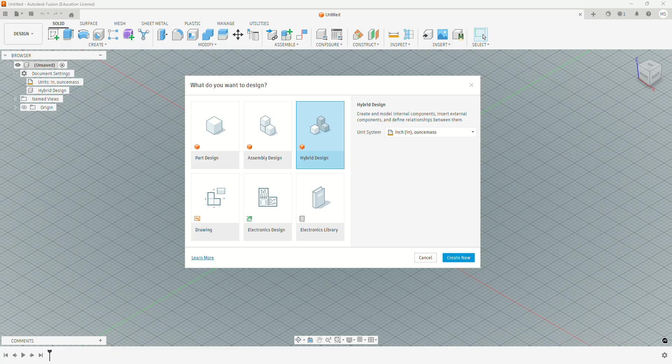The first thing you need to do is get to a new design. In the new update of Fusion, you have to be in a hybrid design. If you're already in here, click on your browser under document settings, and if yours doesn't say hybrid design under the units, click this little pencil and change it from a part design to a hybrid design. The other way is to just start a new design and choose hybrid design. You've got to make sure you're in a hybrid design, because otherwise you won't be able to do new components.

The first thing I'm going to do is activate a new component, because I'm going to build this block up as different pieces. So I'll go to Assemble, New Component, and call it Shape 1. You don't have to name it, you can just call it Component 1, but I'm going to give it names. So now I'm working on Shape 1.

Let's say I want Shape 1 to be like a corner piece of the puzzle cube. So let's create a sketch down here, and I'm going to design it in this corner. Let's create a rectangle.

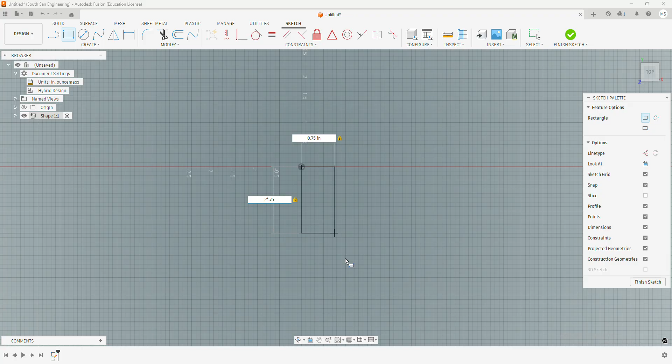It's 3/4 of an inch for each side of the thing. So I'm going to make the top 0.75. And then for the bottom side, I'll go 2 blocks out, so 2 blocks, you could just type in 2 times 0.75. So there's that cube, or well, shape - that's really 2 cubes right next to each other.

Then I'm going to do another rectangle going out here. I'll start from the same point and come out this way, and again make it go 0.75 down. This way will also be 2 times 0.75, which is 1.5 - you can do it that way too. So there's those 2 blocks. Well, there's 3 blocks actually.

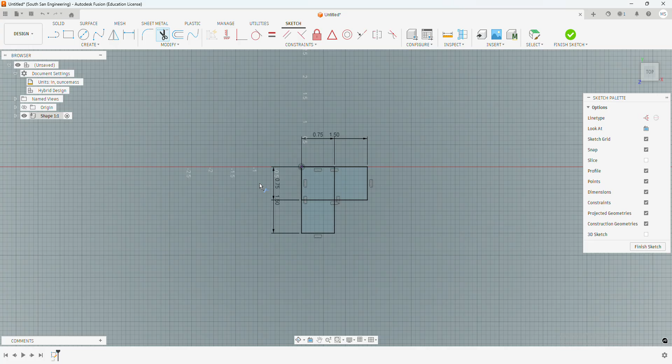Now, because I want it to all be one thing - this is kind of confusing - I'm just going to get rid of the middle stuff, using the trim tool. Now I can finish my sketch. I'm not going to worry about constraining it because I set all the dimensions earlier. Finish my sketch, let's go look at it.

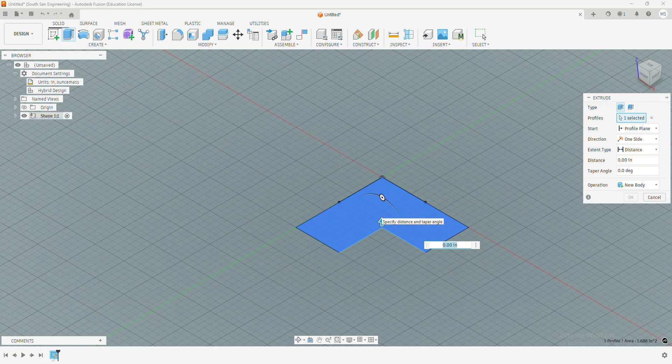That looks good. Okay, so now let's extrude this up, and I'll make it 1 block thick, so that's 0.75. Hit enter. Okay, so I want to add another block to make it look like the Q*bert pyramid from that old game. So I want to put one here.

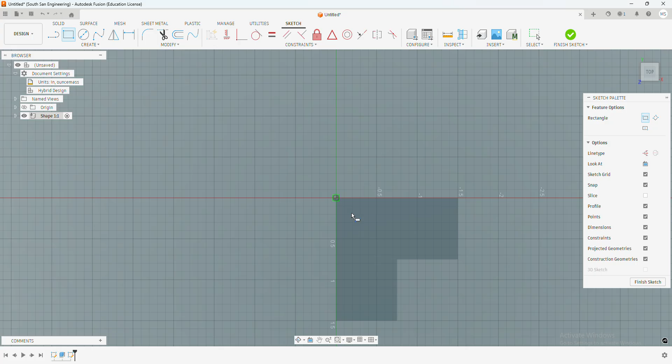So let me add a new sketch on here. Create sketch - I'm going to sketch on the top of this. I'll use my 2-point rectangle tool because I did it with the origin, so I don't have to worry about projecting any lines or anything. I'll just go to the origin, then come down to that point and double check that it's 0.75 by 0.75. Hit enter, and I'm going to finish that sketch.

And now I can take this and extrude that up 0.75. So there is my first block - it's going to be a little corner block made of 4 pieces.

So now that I'm done with this block, I need to start a new component. To do a new component, don't just start doing it here, because otherwise, watch - if I do this, new component, I'll call it component 2 - see how it creates the new component under the first one? I don't want that, so I'm going to hit undo.

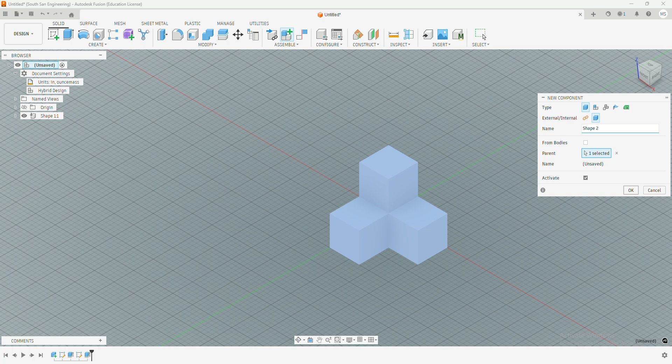I'm going to go back up to my main design, turn it on, and now I'm going to do Assemble, New Component - or it should be that one right there. So let's call this Shape 2. Press OK. So I can still see Shape 1, but I've activated Shape 2 - that's what I'm working on right now.

I want Shape 2 to be the rest of the bottom, right? So like all this part right here - that's 1, 2, 3, 4, 5, that would be 6 blocks. So I'm going to go draw the basis of that out. Let's get to a sketch - I'm going to draw down here.

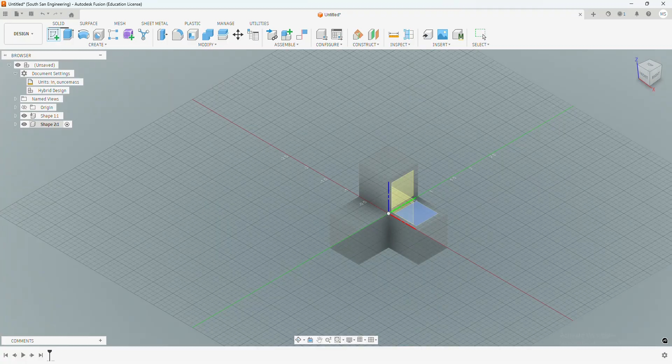If you want to make this fit directly on there, go to Create, Project, or just press the P key, and project these lines in so they become part of your sketch. I'm going to project those 4 lines in. You could just click the whole thing too if you wanted to. It doesn't matter, but this helps. You don't have to do this, but it'll make it fit perfectly when you design it.

Now let's start with rectangles. I'll start from this corner and go all the way over to the end. I want it to go down 1 block, which is 0.75, and then it's going to be 3 blocks long. So I can do 3 times 0.75, which is 2.25. But if you don't want to do math, you can just say 3 times 0.75 and hit enter, and now there it's going over, and I just need to fill in this area.

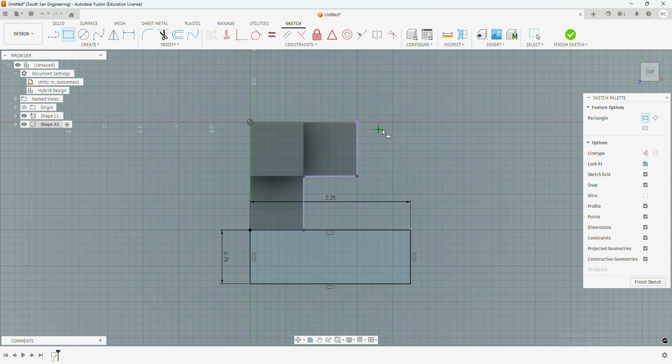I'll do another rectangle, going from that corner to that projected corner. Notice because I projected it in, I don't even need to do the dimensions because it's already set—you can see it says 2.25 and 0.75. So I'll click it, and it enclosed this automatically because all of this is part of my sketch. That's why projecting helps.

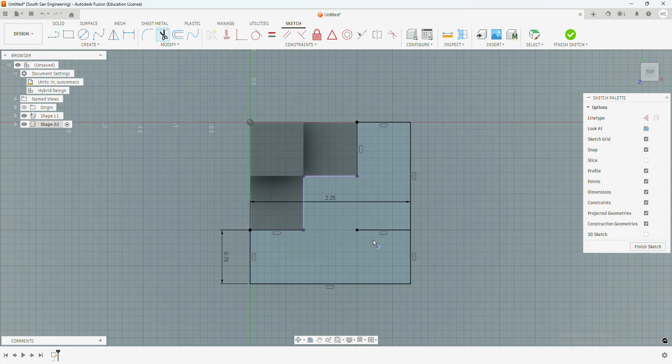So I can finish the sketch. Actually, I'm going to go back and edit that sketch and trim out that stuff inside, using the trim tool—get rid of that, and that, and that. There we go, finish my sketch. Let's look at it. Now I'll extrude that 0.75, hit enter, and there we go.

So there's my second one. If I go back and turn on my main one, now I have 2 blocks, and you can't really tell, but if you move it, see how they're 2 separate things? Okay, so I moved it around—I'll show you that too, we've looked at this before.

If you move it around and want to go back to the way it was, up here where it says position, you can just go to Revert Position. As soon as you change it and press Capture Position, it's going to save it as the default view. So I'm going to revert to there.

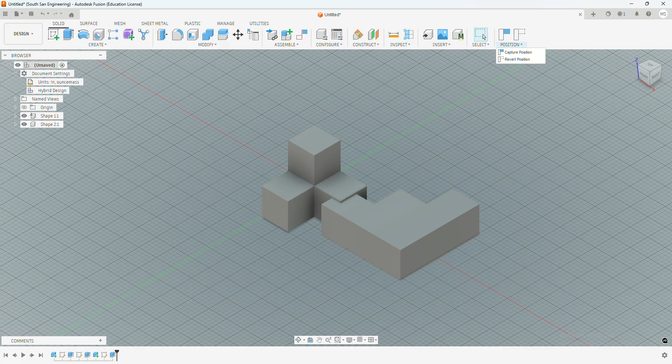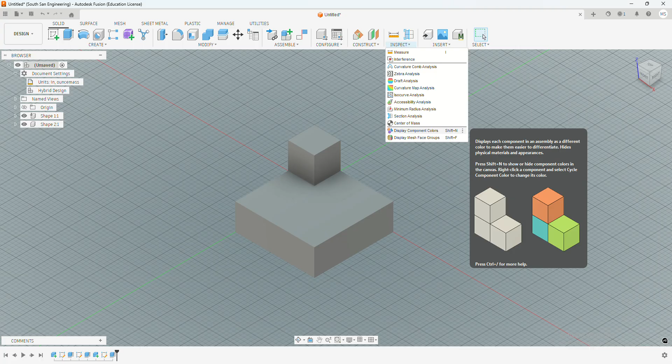But this is hard to look at, right? So you could go to Modify Appearance and change the appearance of these blocks. But another way to look at separate components is under Inspect—the Display Component Colors tool. If you turn this on, every component is defined by a color: shape 1 is yellow, shape 2 is green. Every component you build after this will have separate colors when you turn it on in the main design, making it easier to keep track of your components. Plus it shows you each color in the timeline.

The pink one is your main design. So in my main design, I created a component, then here's what I did with the yellow one, then I made another component and here's what I did with the green one. It kind of helps you keep track of your components. So that's 2 of them. It doesn't matter how you do it.

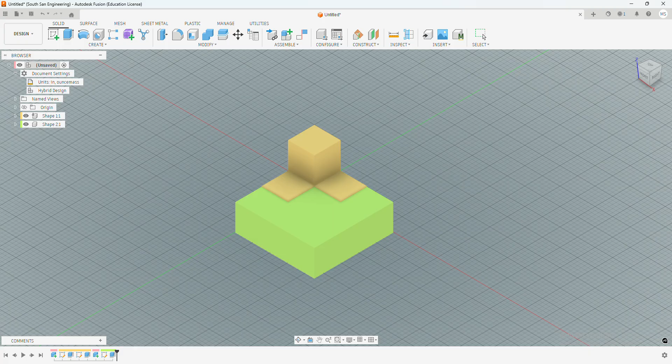All your shapes are going to be different, but as long as you make them 0.75, or some multiple of 0.75, and project in to help you get the geometry correct, you should end up getting it to work. And then, if you want, once you have it all together—if you didn't design it like this—you could just joint these things together.

You could go to Assemble, Joint, and just like we learned how to joint stuff, you could take that top corner and attach it to that corner right there, and get the same thing. So if you don't build it the way I showed you, you could still joint it together and make it work. Remember, your block should have 5 pieces, and they should all fit together and all be components. So when you look at the whole browser, you should see all 5 components under the document.